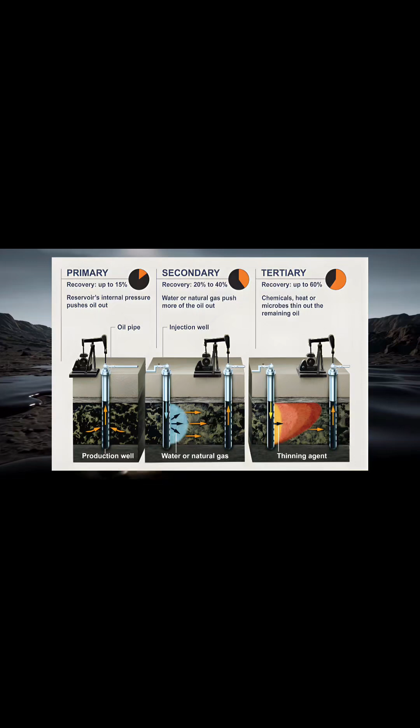Chemical EOR, which is the enhanced oil recovery method, serves as the tertiary recovery method, implemented once the first two stages have been fully leveraged. EOR is necessary because conventional extraction methods typically leave 60–80% of oil trapped within reservoirs. Primary recovery, which relies on natural reservoir pressure, typically only extracts 10 to 15% of the original oil in place. Secondary recovery methods like water flooding may increase this recovery to 20–40%.

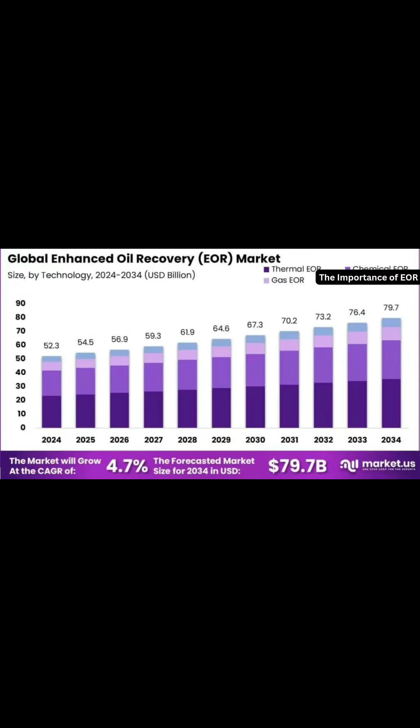This limited extraction efficiency means significant oil resources remain trapped underground. These remaining oil reserves amount to billions of barrels of potential energy that would otherwise go unused. By contrast, EOR techniques can access much of this remaining oil to meet global energy demands. It significantly increases the amount of extractable oil from existing reservoirs, typically enabling the recovery of 30 to 60% of the original oil in place. This substantial improvement unlocks billions of additional barrels of oil production globally.

Besides, many oil fields considered depleted under conventional recovery methods contain significant untapped potential. EOR transforms these seemingly exhausted assets into valuable production centers once again. The importance of EOR grows as easily accessible oil reserves continue to deplete worldwide. It's a critical approach for energy companies seeking to maximize production from existing fields rather than relying solely on new discoveries. EOR techniques encompass a range of processes developed to significantly increase oil production beyond conventional recovery methods.

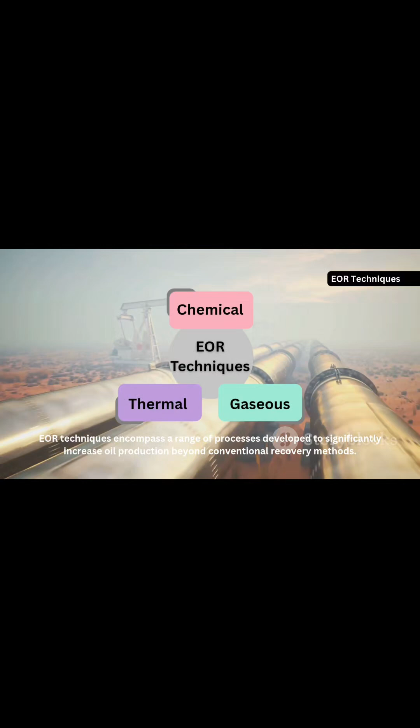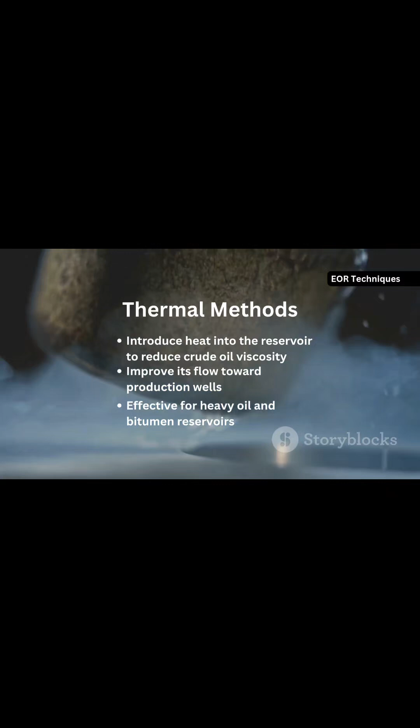Thermal EOR methods involve introducing heat into the reservoir to reduce crude oil viscosity, thereby improving its flow toward production wells. These techniques are especially effective for heavy oil and bitumen reservoirs, where high viscosity severely restricts oil mobility. Common thermal EOR methods include steam injection, in situ combustion, and electrical heating.

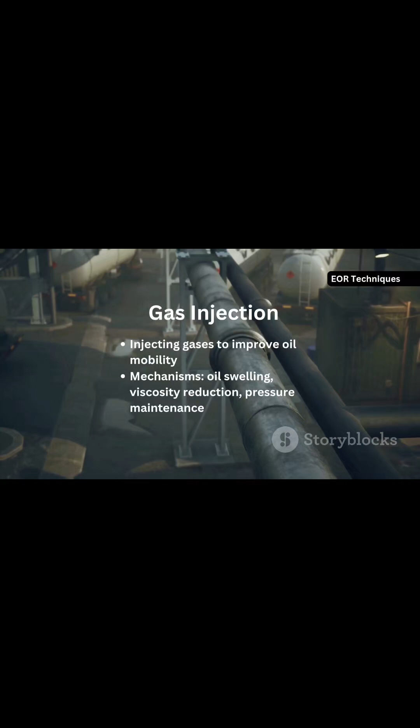Gas injection EOR techniques enhance oil recovery by injecting gases that improve oil mobility through mechanisms such as oil swelling, viscosity reduction, and pressure maintenance. Depending on reservoir pressure and fluid properties, these methods may be miscible or immiscible. Gas injection EOR is generally more effective in medium to light oil reservoirs, with commonly used gases including carbon dioxide, nitrogen, and hydrocarbon gases.

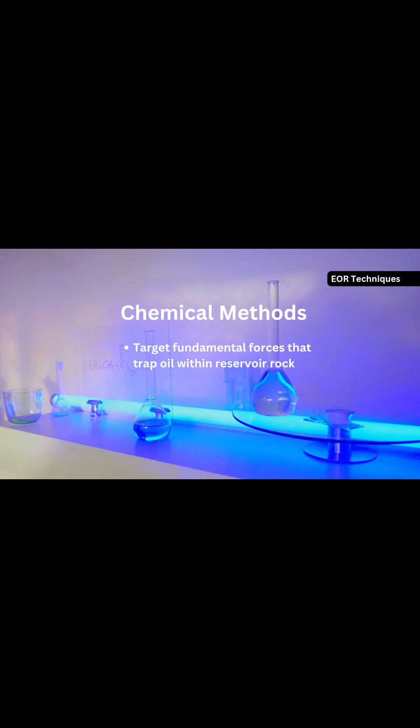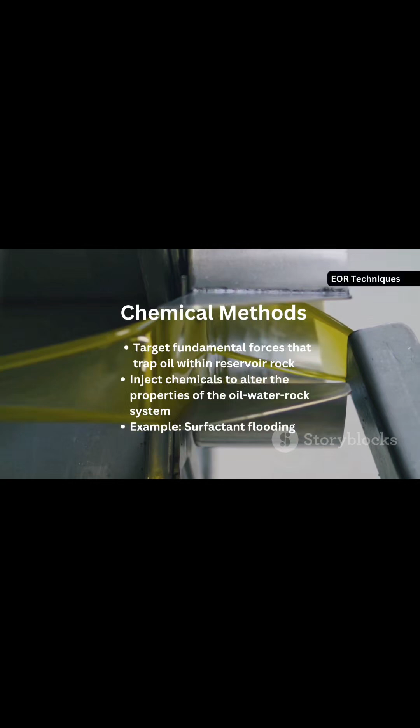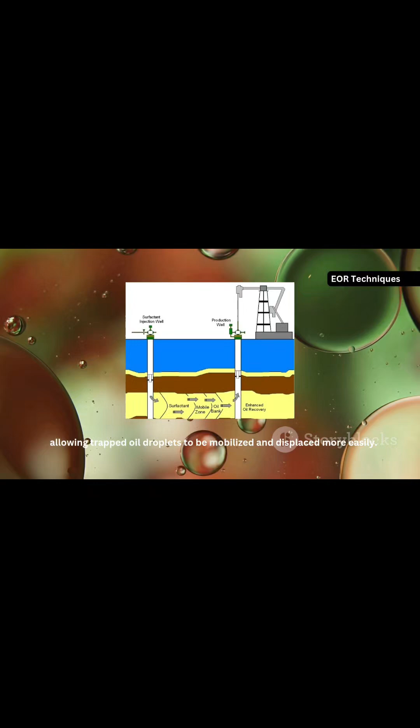In contrast, chemical EOR techniques, particularly surfactant-based methods, directly target the fundamental forces that trap oil within reservoir rock. Chemical EOR involves injecting chemicals to alter the properties of the oil-water-rock system, making it highly versatile and applicable across a wide range of reservoir conditions. Surfactant flooding plays a critical role in chemical EOR by reducing the interfacial tension between oil and water, allowing trapped oil droplets to be mobilized and displaced more easily. This reduction in interfacial tension significantly weakens the capillary forces that hold oil within pore spaces.

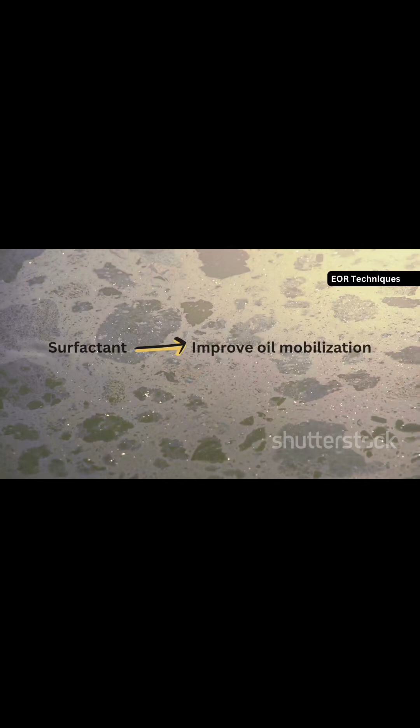To further enhance recovery efficiency, surfactants are often combined with polymers in surfactant polymer (SP) flooding. In this approach, surfactants improve oil mobilization, while polymers increase the viscosity of the injected water, improving sweep efficiency and reducing early water breakthrough. Through this combined mechanism, surfactant-based chemical EOR enables the effective displacement of residual oil that cannot be recovered using thermal or gas injection methods alone, making it a key technology for maximizing oil recovery from mature and complex reservoirs.

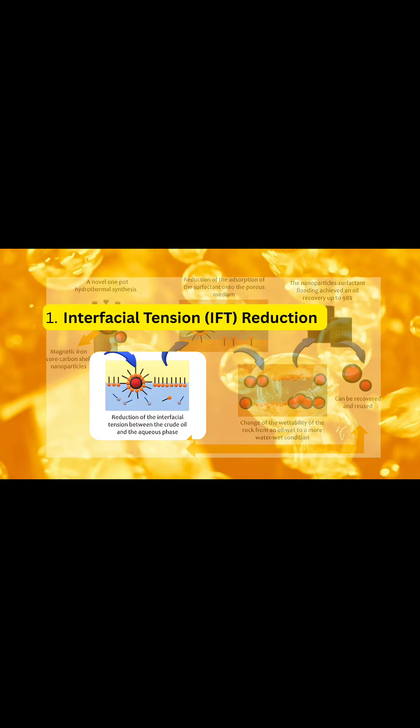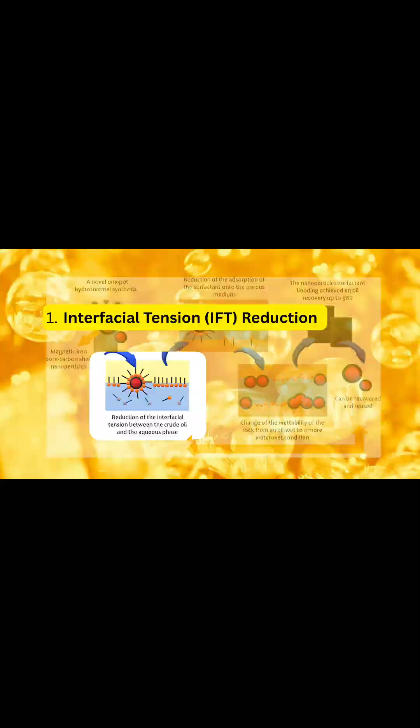In research conducted by Jia and Kong, 2025, the article explained how surfactants and nanomaterials work together to overcome capillary forces and maximize oil recovery through three primary mechanisms. The first mechanism is through interfacial tension, IFT, reduction. Surfactants are amphiphilic molecules with a hydrophilic head and a lipophilic tail. They migrate to the oil-water interface, reducing the cohesive forces that trap oil droplets. When combined with nanoparticles, this effect is amplified, reaching ultra-low IFT levels. This allows trapped oil to deform and flow. The second mechanism is mitigation of surfactant adsorption.

A major challenge in EOR is the loss of surfactants due to their tendency to stick to reservoir rock. Nanoparticles act as sacrificial agents by competitively adsorbing onto the rock surface first. This prevents surfactant loss, ensuring more of the chemical reaches the oil bank to facilitate recovery.

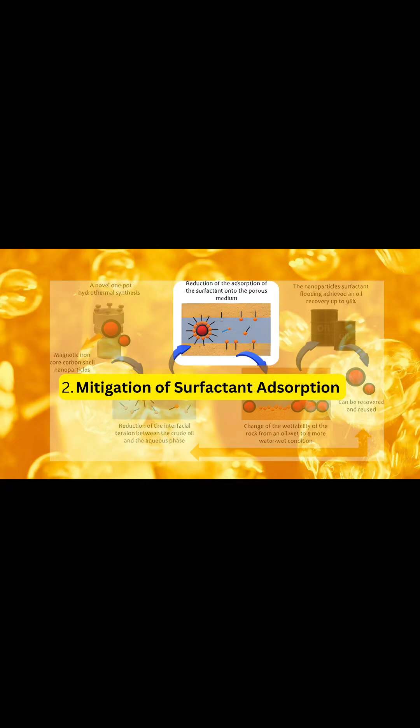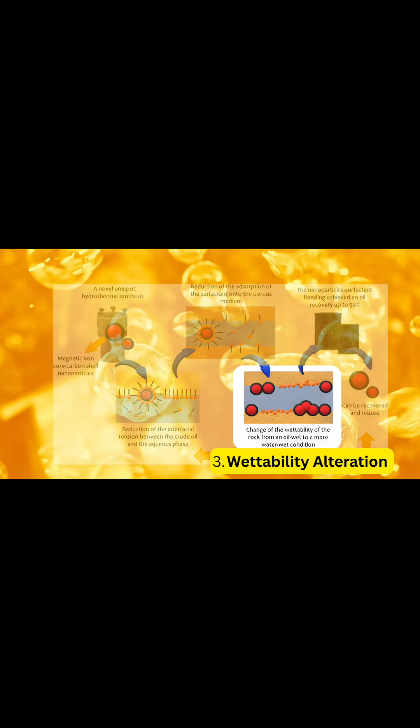The last mechanism is wettability alteration. Surfactants alter the rock surface from oil wet, where oil clings to the stone, to water wet. Nanoparticles further this by creating structural disjoining pressure. As nanoparticles accumulate in the wedge between oil and rock, they form organized layers that physically peel the oil droplet away, allowing it to be swept toward production wells.

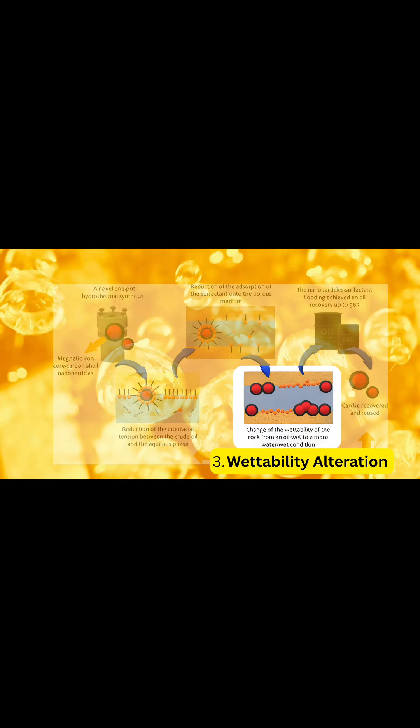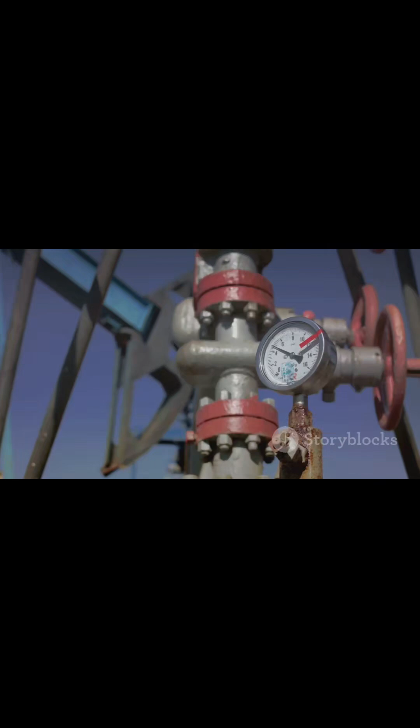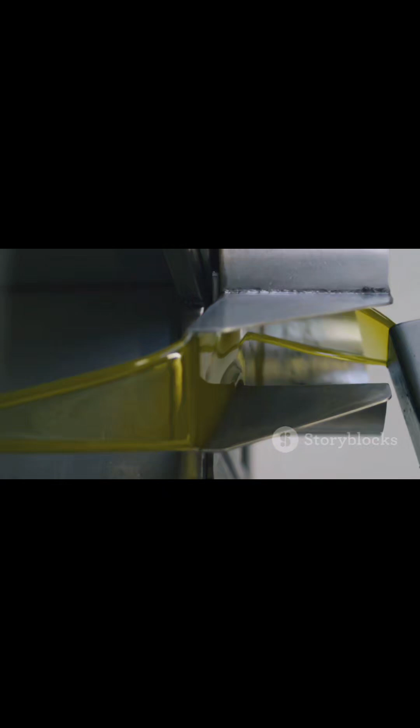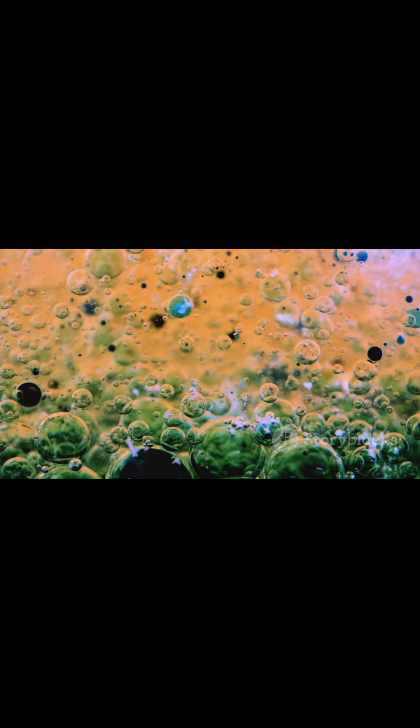After water flooding, oil remains trapped in oil-wet carbonate pores. Injected surfactant reaches the oil-water interface, lowering interfacial tension. Wettability shifts from oil wet to water wet. Detached droplets merge and move toward the well. Polymer improves sweep, reducing channeling. Result: lower residual oil and higher recovery.

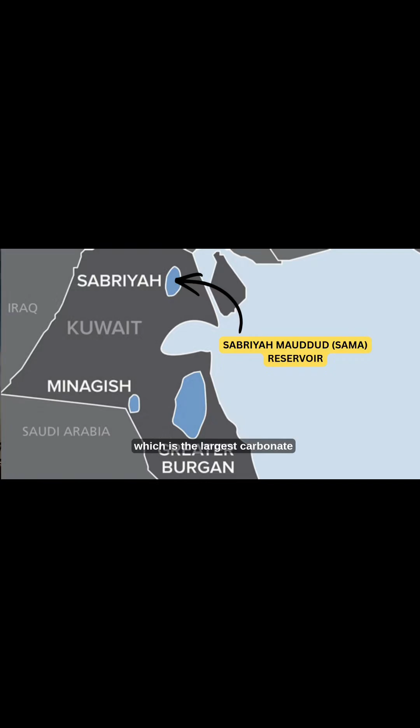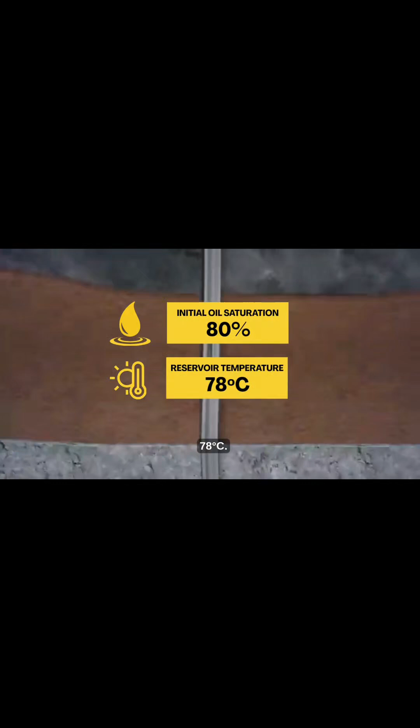An example of the real-life applications of surfactants in EOR is in the Sabriyah Mauddud (SAMA) Reservoir, which is the largest carbonate reservoir in northern Kuwait. The reservoir still contains a high initial oil saturation of approximately 80%, and the reservoir temperature is around 78 degrees Celsius. Due to the large amount of remaining oil and the limitations of conventional recovery methods, enhanced oil recovery was required to meet production targets.

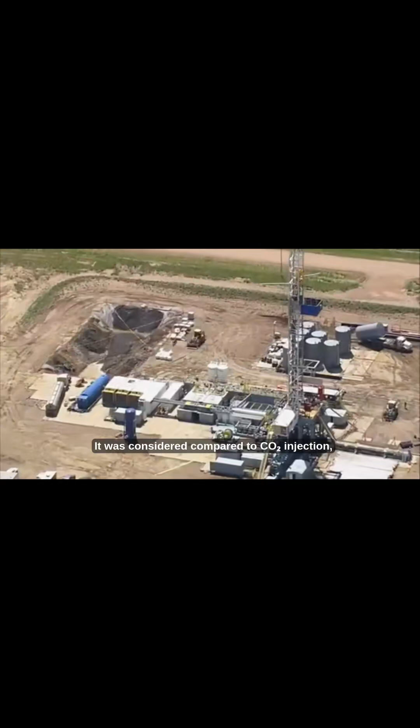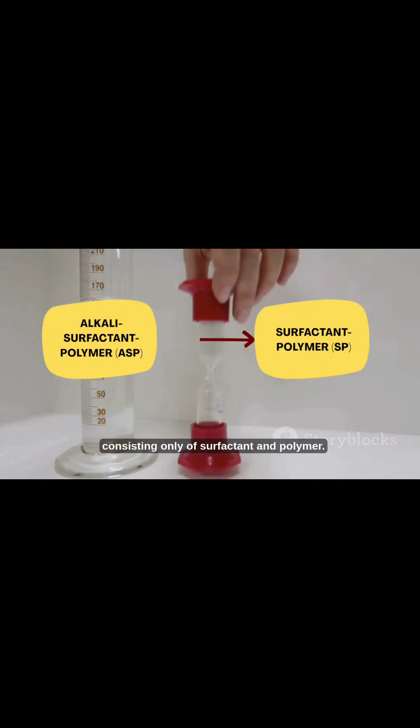During the planning stage for the EOR, chemical EOR was selected. It was considered compared to CO2 injection, which was found to be unsuitable due to the large volume of CO2 required and high surface facility demands. In preparing the surfactant system required, the formulation was modified from ASP to SP flooding, consisting only of surfactant and polymer. This is because the analysis of Sama oil samples showed a very low total acid number, around 0.05, hence the oil had little tendency to react with alkali to generate in situ soap.

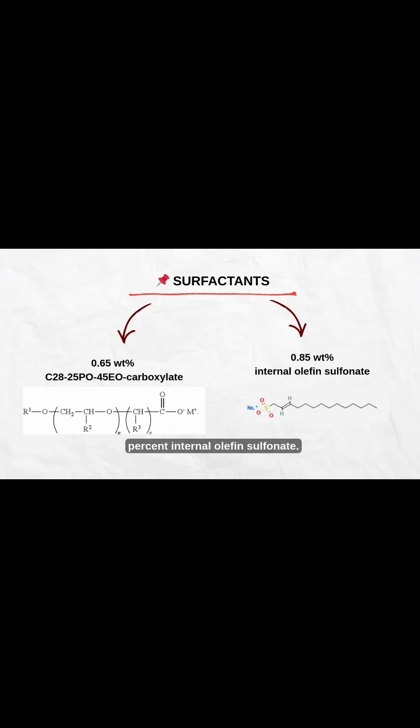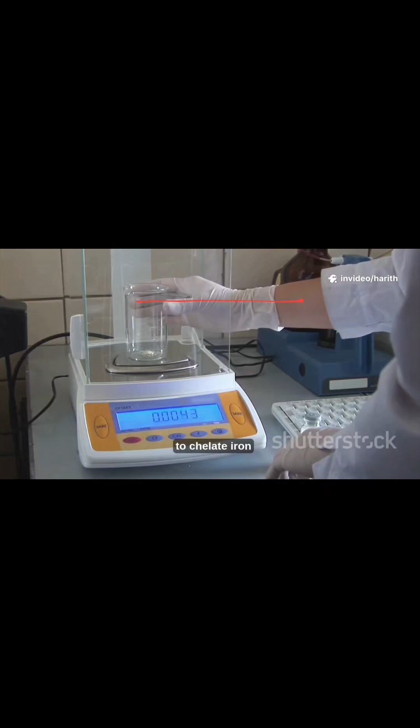The surfactant system used included 0.65 weight percent C28-25PO-45EO-carboxylate and 0.85 weight percent internal olefin sulfonate. FP3330 polymer was added to increase solution viscosity and improve mobility control. Additionally, 1% Na4EDTA was included to chelate iron and alter wettability from oil wet to water wet conditions. Further optimization was carried out by varying surfactant and polymer concentrations and testing the addition of alkali using soda ash.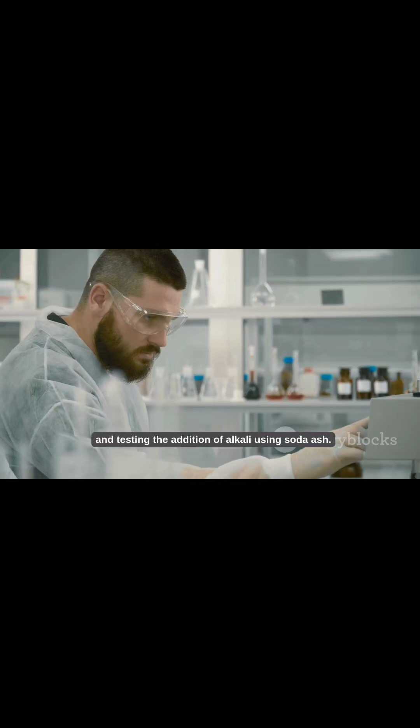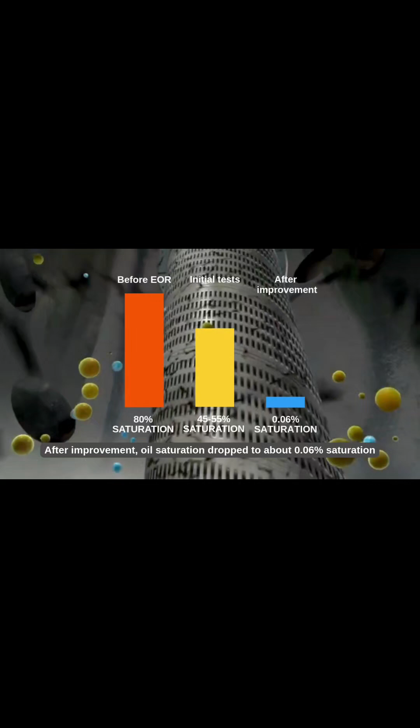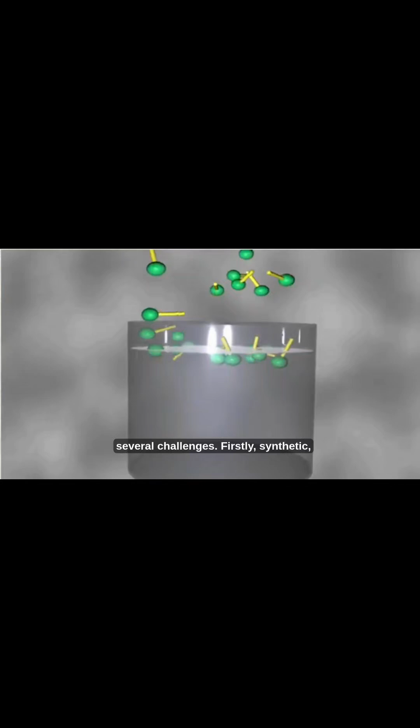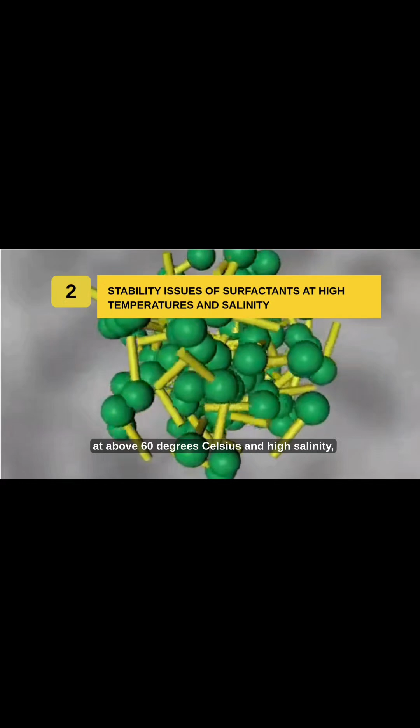Despite their effectiveness, surfactants in enhanced oil recovery (EOR) face several challenges. Firstly, synthetic petroleum-based surfactants are toxic and can harm the environment. Secondly, most surfactants are unstable at high temperature, above 60 degrees Celsius, and high salinity, which reduces their performance in harsh reservoir conditions. There are a few advancements in EOR to combat the challenges.

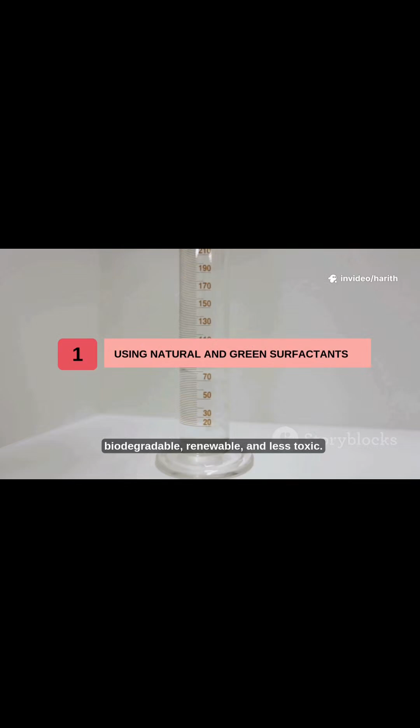Firstly, using natural and green surfactants that are biodegradable, renewable, and less toxic. Examples include surfactants derived from tarragon, Tanacetum plants, and flaxseed oil. These natural surfactants are equally efficient, reducing oil interfacial tension and improving oil recovery. Another improvement is the use of nanoparticles such as silica, magnetite, and graphene oxide. These nanoparticles help increase surfactant stability, reduce adsorption losses, and enhance performance under high temperature and high salinity conditions, leading to more efficient oil recovery.

Surfactants are changing EOR. They lower interfacial tension. They flip wettability. Polymers improve sweep and flow conformance. They push what water misses. Trapped oil becomes mobile. Then it moves to the wellbore. Result: much lower residual oil saturation and higher recovery than water flooding. Clean chemistry, better recovery.